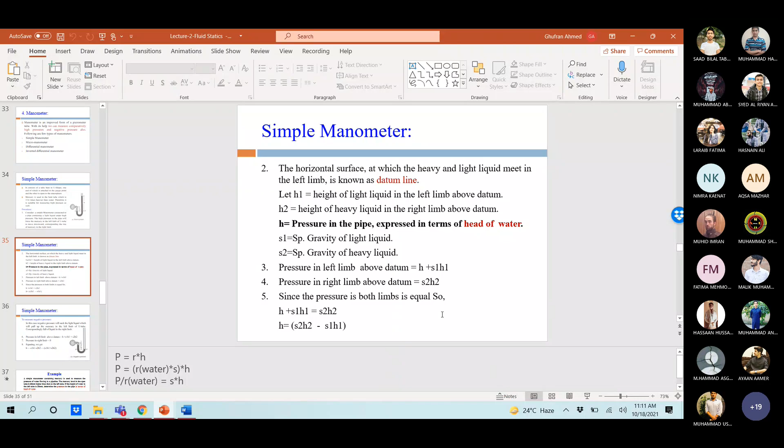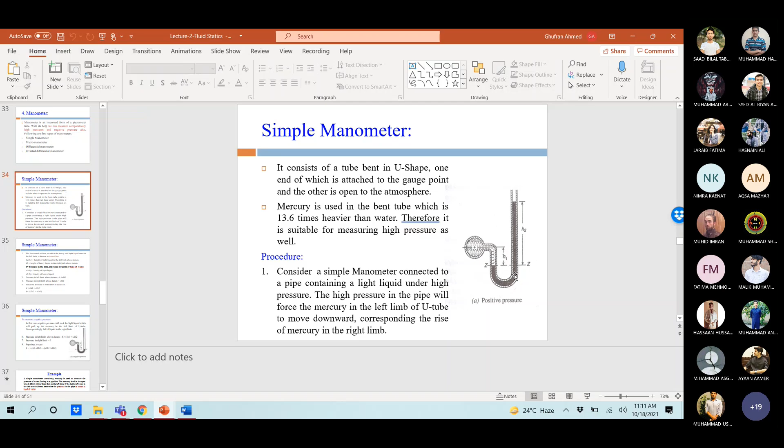Okay, so can we measure a negative pressure from this manometer as well? Nahi sir, uska effect cancel ho jata hai. How? I mean, kyunki sir ye jo base line hai Z, toh positive negative cancel ho jata hai isse. I'm asking about the negative pressure within the pipe, not the manometer.

If you have a negative pressure here, then this mercury, instead of moving down, it will move upward.

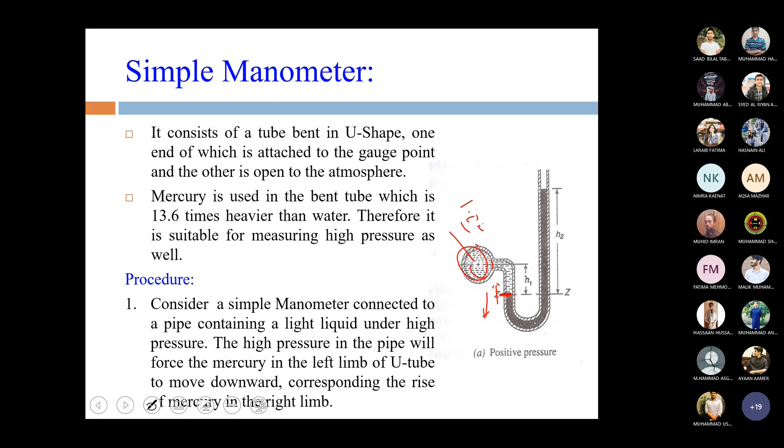Okay, so negative pressure, I mean, the flow moves from high pressure to low pressure. So if it has low pressure here, then the level of mercury in the left limb would be slightly higher, as you can see from this simple manometer. To measure the negative pressure, the mercury shifts to this level, and now the datum is decided from the right limb. So manometers can actually measure the negative pressure as well.

Okay, so do you have any confusion in forming these equations? Just like pressure in the left limb above datum is H plus S1 H1. Similarly, pressure in the right limb is S2 H2. So do you have any question regarding this?

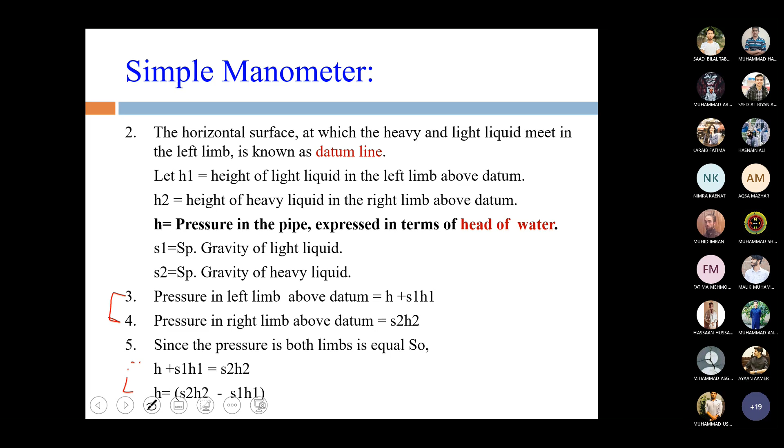Okay. So can you solve this example? Who can solve this example? Very simple example.

I think we have solved it. No sir, last week example ki nahi thi? Sir aapne sample laga tha, usko dekh lena.

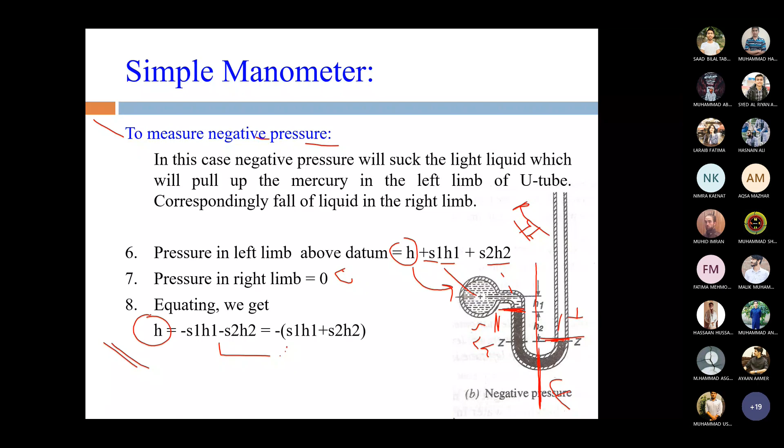Okay, so now the first example says that a simple manometer containing mercury is used to measure the pressure of water flowing in a pipeline. So say it has water in it, and the mercury level in the open tube is 60 millimeter higher than that of the left tube. Okay, so 60 millimeter is higher than that of the left tube.

So if left tube is here, 60 is the H2 basically. Okay, and if the height of water in the left tube is 50 millimeter, so this is height of water. Determine the pressure in the pipe. So equation kya hogi iski, kaun batayega?

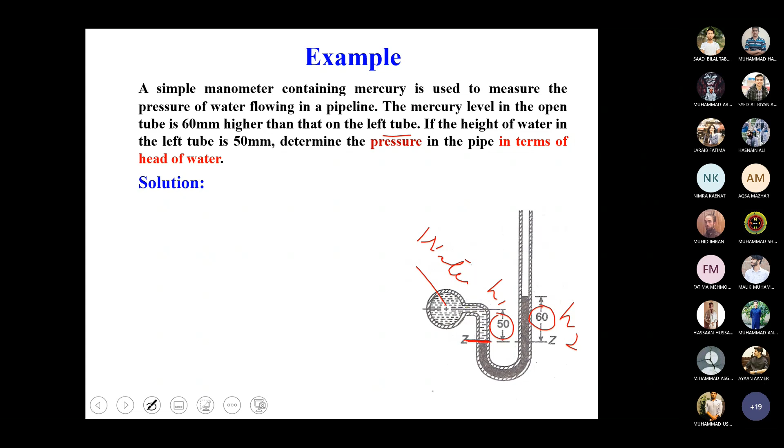सर पहले हम लेफ्ट लिम्ब में प्रेशर फाइंड कर लेंगे और राइट लिम्ब में प्रेशर फाइंड करके दोनों को बराबर करेंगे। इक्वेशन बताओ दोनों की। सर लेफ्ट लिम्ब की इक्वेशन होगी H प्रेशर विल बी इक्वल्स टू H प्लस S1 H1 और राइट लिम्ब की होगी प्रेशर विल बी इक्वल्स टू S2 H2।

Okay, is it clear? So actually, just want to confirm that these pressures are pressure expressed in terms of head of water. Okay, so just remember these are the pressure which are expressed in terms of head of water.

So now by just putting the value of S1 which is of water and H1, S2 which is 13.6, so here S1 is 1 and S2 is 13.6, okay, and all the respective heights are provided in the figure. So just put all the values here and find the value of H. Is it clear?

Yes sir. Okay, आगे चलें। Okay, so now another example.

Find negative pressure. A simple manometer containing mercury was used to find the negative pressure in a pipe containing water. The right limb of the manometer was open to atmosphere. Find the negative pressure below the atmospheric pressure.

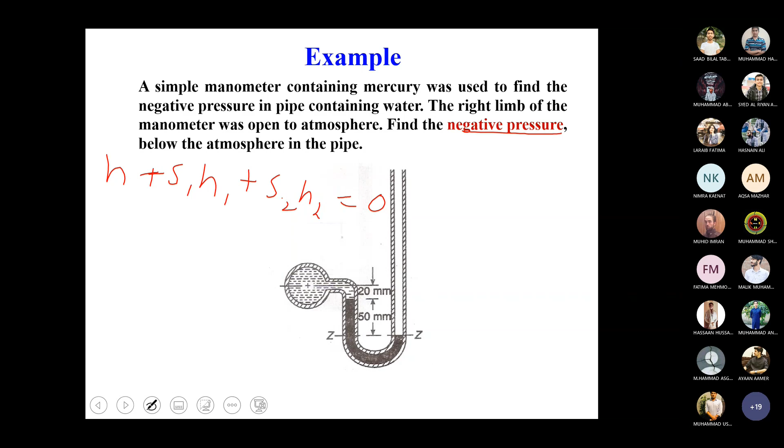Yes, no? Yes sir. What is the value of H1 in this figure? Sir, 20. Very good. And what is H2? 50. Very good. So you just put all the values here, and it is asked to find the negative pressure. Okay, if you compare both the examples here,

just look at the last line. What's written here? Determine the pressure in a pipe in terms of head of water. Means we need to find H, which is actually pressure expressed in terms of head of water.

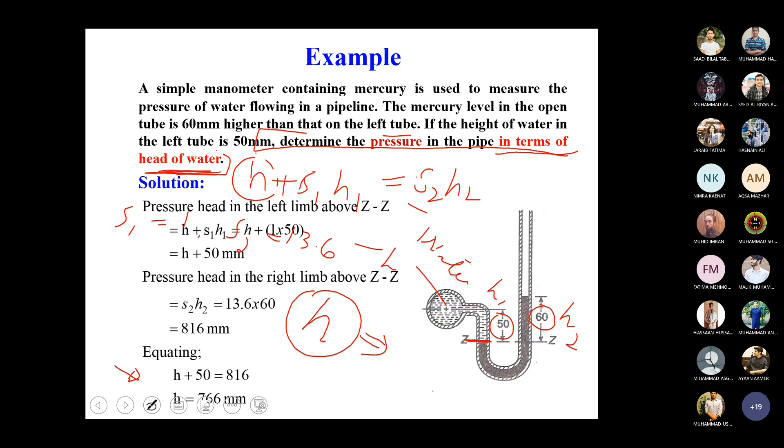Okay, but in this example, he asked to find the negative pressure, and pressure is basically P. It is not H here. Okay, so what is the relationship between P and H? Directly proportional. P is equal to gamma H.

Okay, so when we have the pressure, once we have found the pressure in terms of head of water H, we just simply multiply with the gamma of water in order to find this pressure. Okay, so be careful, during exam when you are asked about this manometer type problem, then just check out whether it is asked to find the pressure, or you are asked to find the pressure

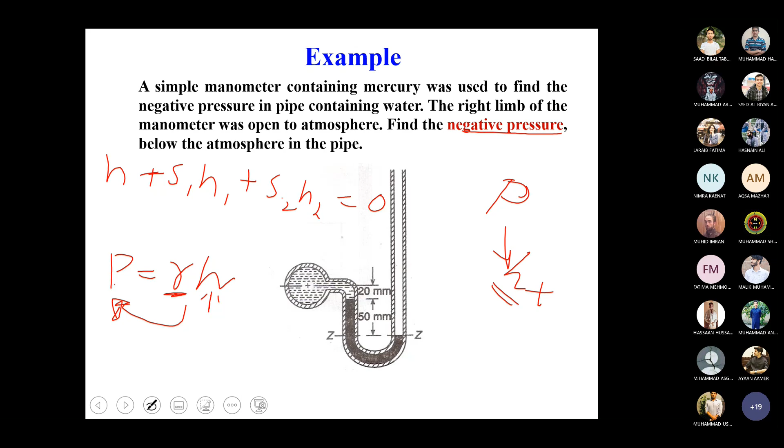in terms of water columns. Okay, so once we have found the head, you just multiply with the gamma, which is 9.81, to get the negative pressure or gauge pressure. Okay, any question? No sir.

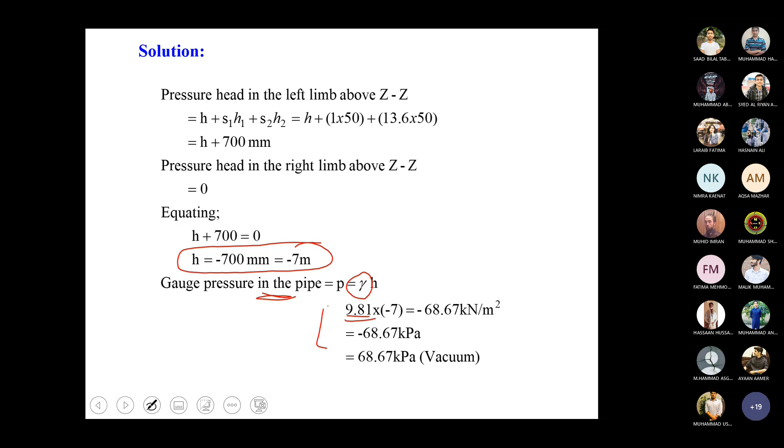Okay, another example. Figure shows a conical vessel having its outlet at A. This is point A, to which U-tube manometer is connected. The reading of the manometer given in the figure shows when the vessel is empty.

Okay, so this manometer reading is actually for the condition when there is no fluid in it. Okay, say there is no water in it, it is empty. So the datum actually shows the left limb reading of 200 millimeter. So here, say for the first case, H2 is 200.

यहाँ तक कोई confusion नहीं? And H, basically H is here as H1. Any confusion up till now? अभी हमने यहाँ तक समझ लिया।

Okay, next is find the reading of the manometer when the vessel is completely filled with water. Okay, after you just fill this vessel with water, what will happen? कौन बताएगा?

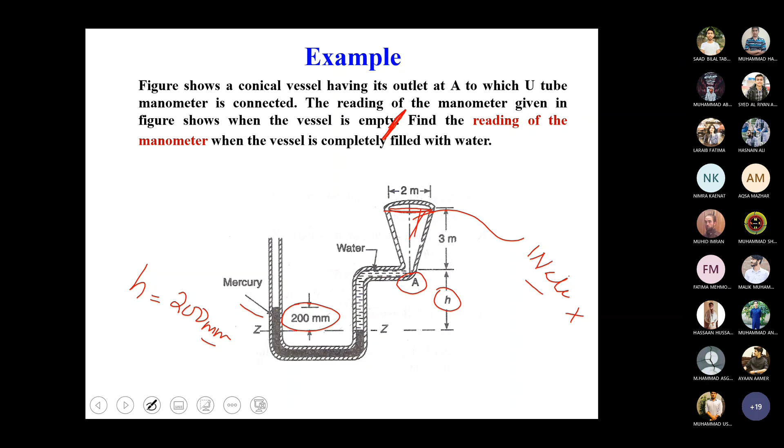ये अब यहाँ से पानी इसमें हमने इंसर्ट कर दिया। सर, लेफ्ट राइट लिम्ब से मर्करी का लेवल डाउन हो जाएगा और लेफ्ट लिम्ब पे इंक्रीज हो जाएगा। Very good. मर्क्यूरी का लेवल यहाँ से डाउन हो गया, डेटम इधर आ गया, और यहाँ से मर्क्यूरी का लेवल ऊपर चला गया। ठीक हो गया जी।

तो अब न्यू डेटम कौन सा बन जाएगा? ये वाला। एग्री कर रहे हैं?

So at the moment we do not know what is the level of mercury which will be suppressed, say X। Okay, और यहां से X ऊपर गया और इधर भी X की वैल्यू ऐड हो जाएगी।

Why have I written here X? सर डेटम भी तो रिड्यूस हो गया, इस वजह से यहाँ पे भी एक्स ही आएगा। वेरी गुड। सो डेटम जब रिड्यूस होगा तो means there would be a change of 2X in the left limb. Yes, no? यस सर। Okay, so can you tell me the equation for the right limb?

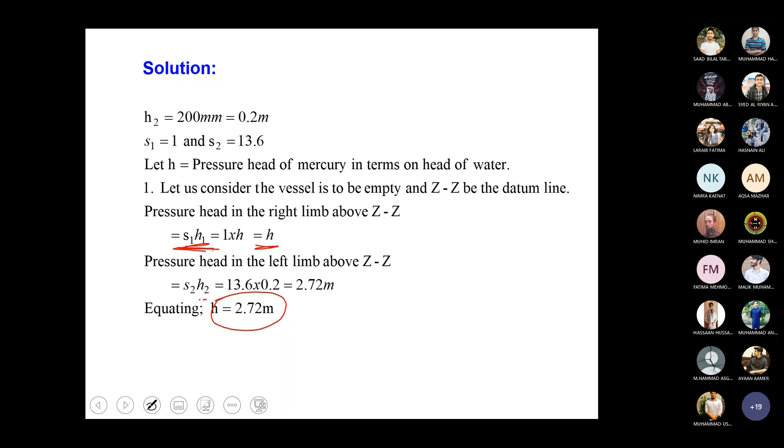So when there was no liquid in a vessel, S1H is equal to H. So H ki yahan se hum equation find kar sakte hain. Ji bilkul, theek hai ji. So once you have this H, so now you will make equation.

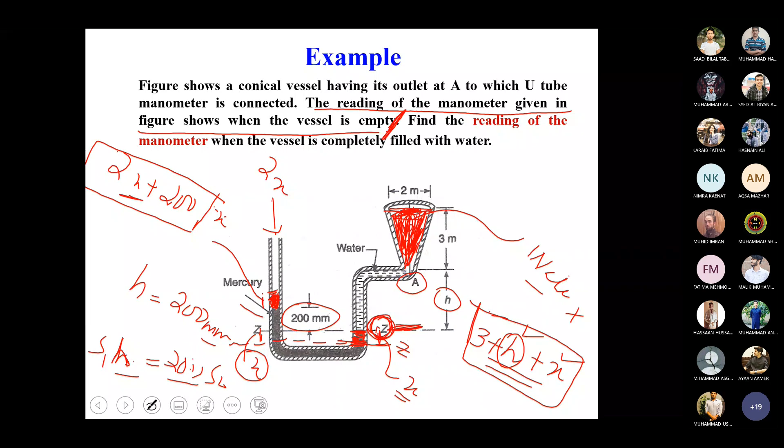Therefore, the total height of water in the right limb would be, it is again x plus h plus 3, jo maine yahan likha hai, x plus h plus 3. H agar 2 point something hai, 2.72, so then the equation for right limb becomes x plus 5.72.

Similarly, for the left case it is 0.2, which is 200 after converting it to meters, plus 2x. Okay, and you can equate, and finally you have the manometer reading, which is 0.2 plus 2x.

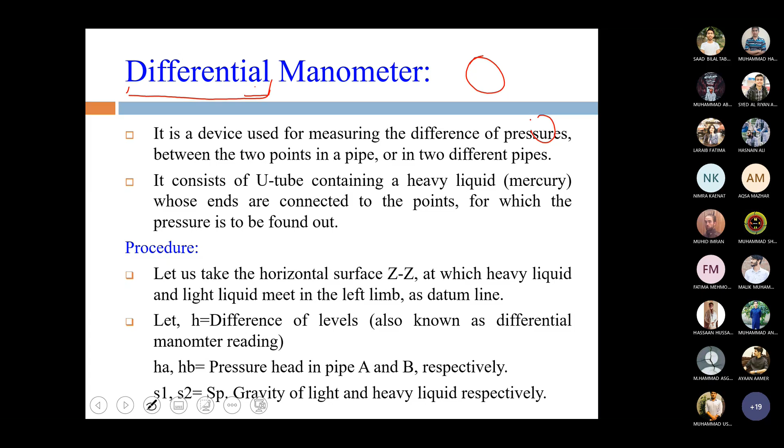So next manometer is of differential manometer. As from this word, you can see that this manometer is used to find the difference of pressure between, say, the two pipes. So if you connect this manometer between two pipes, then it will give us a difference of pressure between these two pipes. Okay.

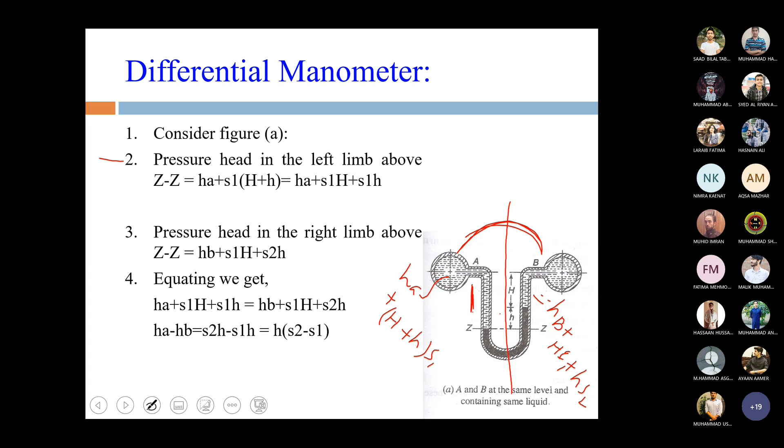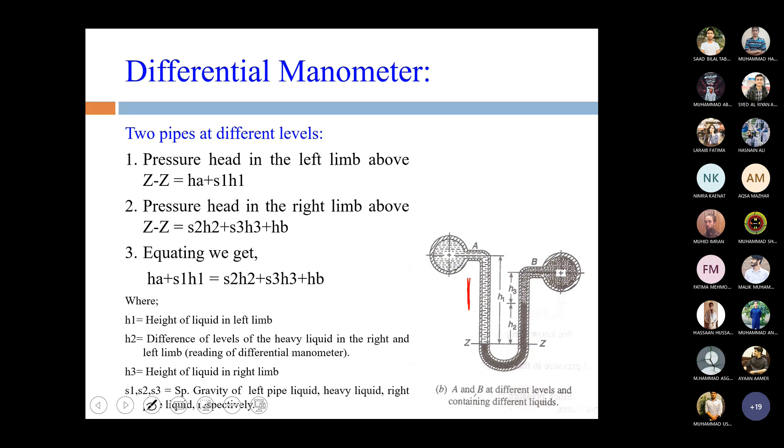Theek hai ji, any question? Very simple. Again, you just have to focus on the height and its respective specific gravity. Okay.

Okay, another example, a U-tube differential manometer connects two pressure pipes A and B. The pipe A contains carbon tetrachloride having a specific gravity of 1.6. So this is for pipe A. Okay, under a pressure of 120 kilopascal.

Okay, the important thing in this example is that this is the pressure. The value of pressure P is provided here, it's not the H. Similarly, the pressure in a pipe B is 200 kilopascal, which is PB. So this one is PA and PB.

The pipe A lies 2.5 meter above pipe B. So here's a distance between these two pipes, elevation difference. Find the difference of pressure measured by the mercury as a fluid filling U-tube.

So first of all, as the pressure is given, so we can convert this pressure in terms of height of water by just dividing with the specific weight of water. If we divide this PA by gamma of water, which is 9.81, we actually get the height of water column, which is 12.2 meters of water.

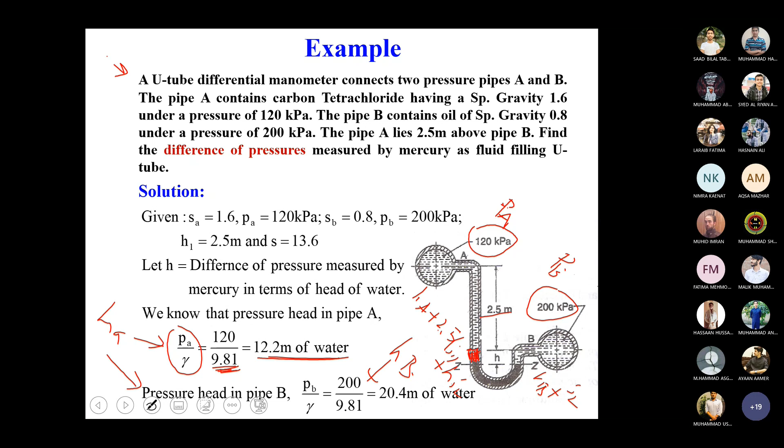So as the value of pressures are given, the only thing which is unknown is this H. So separately we can write the equations for left limb and for the right limb, and when we equate both the equation we can simply find H. Any question?

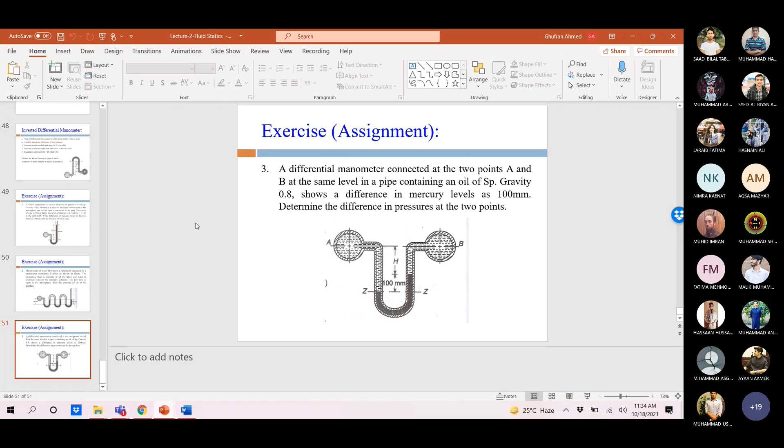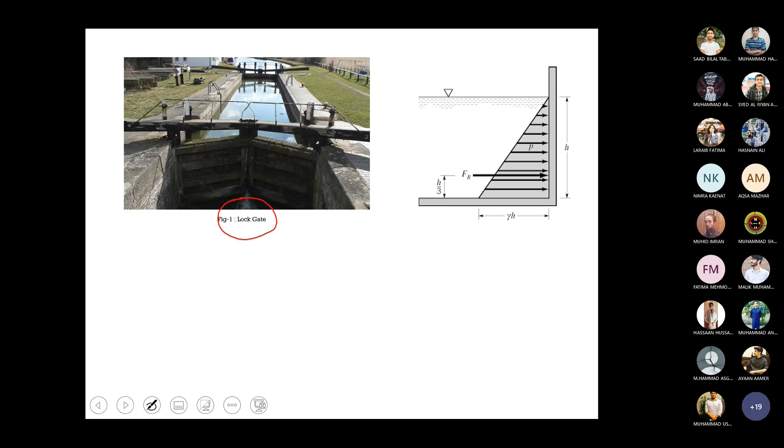It's written lock gate. Lock gate means just like if we have a very small stream of water or channel, then we provide a gate in order to restrict the water flow, in order to obstruct the water flow. So now in this scenario it becomes the static fluid. It comes to rest.

So this is the free body diagram. This is a gate and the total height of water is H here. The pressure distribution diagram is shown in this figure, which is triangular. Meaning if we move deep, then the pressure increases. P is equal to gamma H. Greater the height from the top, greater would be the pressure.

So what are the important things which we should find out regarding this pressure distribution? Can anyone tell what is most important in this figure, in the right figure? Resultant force. Very good. Resultant force is very important. What would be the resultant force acting on this gate?

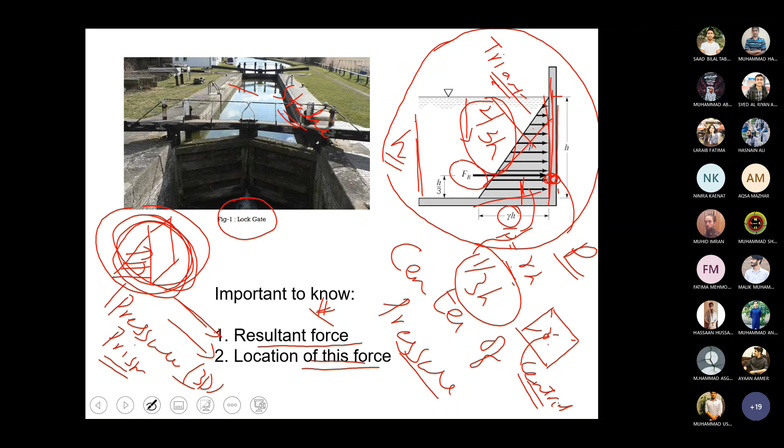If we find the centroid of this triangle, what will it be? From the top it will be 2/3 of h, and from the bottom it will be 1/3 of h. So if we justify this pressure distribution diagram, then we can say that the resultant force will act at the centroid of the pressure distribution, not the centroid of the body, but the centroid of this pressure distribution.

So no tangential force can exist within a fluid at rest. All the forces are normal to the surface. We have already discussed this point in our previous lecture as well. If the fluid is not moving, then there would be no tangential force acting on it. However, there would be only normal forces which are acting perpendicular to the body surface. If pressure is uniformly distributed over an area, the force is equal to the pressure times the area, and the point of application of this force is the centroid of the area. This is how pressure works: the force equals pressure times the area.

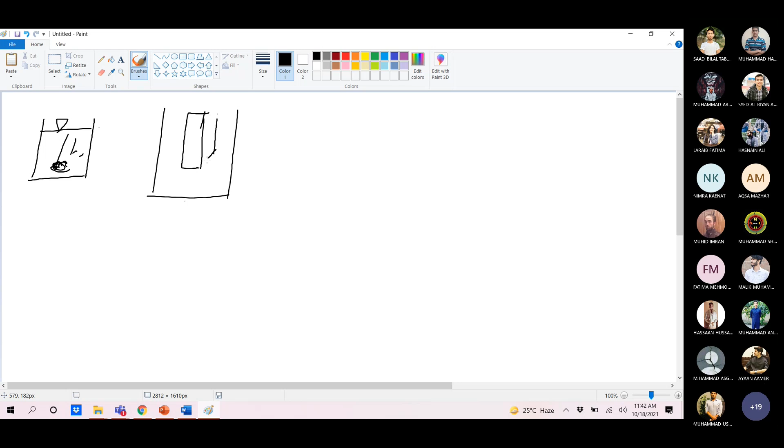Say we have a water tank. Consider this particular point, the height is h. If we consider this thing in a 3-dimensional column, this is the area, and the height of this water column is h.

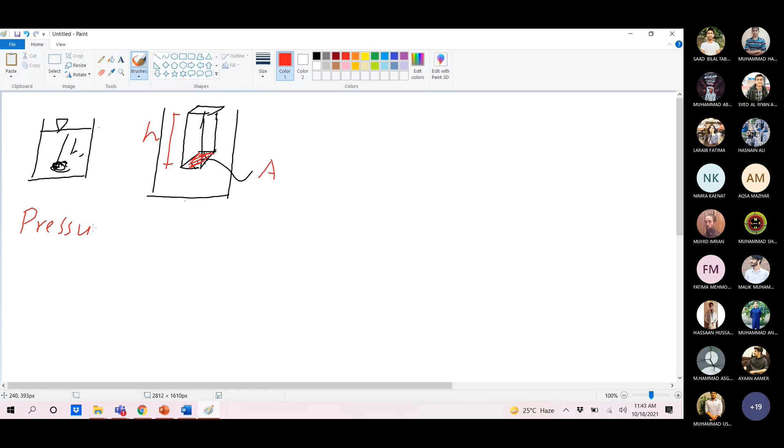So what would be the pressure at this point P? It is basically equal to force per unit area.

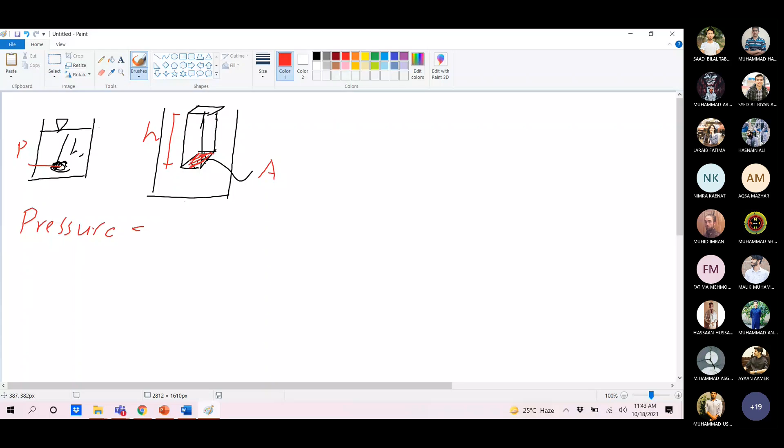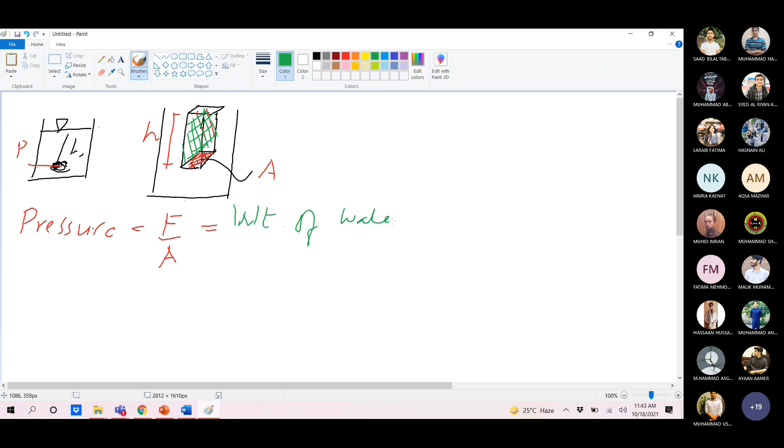And what is the force basically here? The force is actually the weight of the water column exactly over this area A. So force will become: weight of water column above this area A.

And what is the weight here? Mg divided by area A. And we know that density is equal to mass per unit volume, so M is equal to density into volume. So we can write here density into volume times G divided by area A.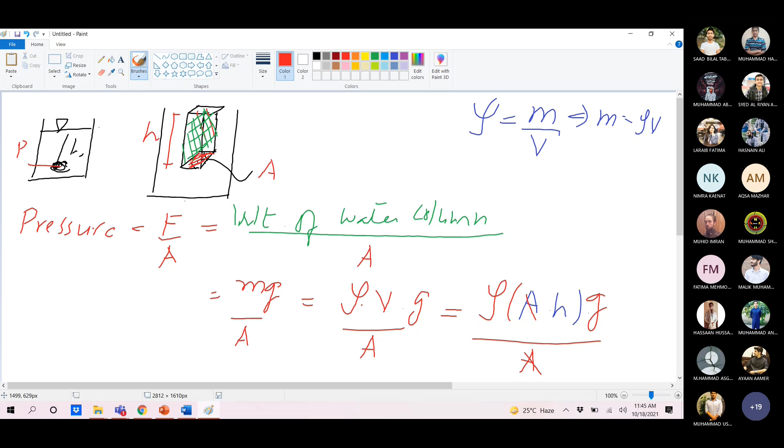And what is the volume here? Volume I can write as A into H. Divided by area. So this area will cancel with this area, and our answer would be rho G H.

So pressure actually depends on three things. One, density - obviously if you fill this column with mercury instead of water, then the pressure would be different against the same height. Second is depth. And third, gravitational constant - for Earth, if it's not changing, then it is same. However, the pressure changes with the gravitational constant as well.

So to find force on a submerged wall, the pressure increases as we move down. Any question in this description? No sir.

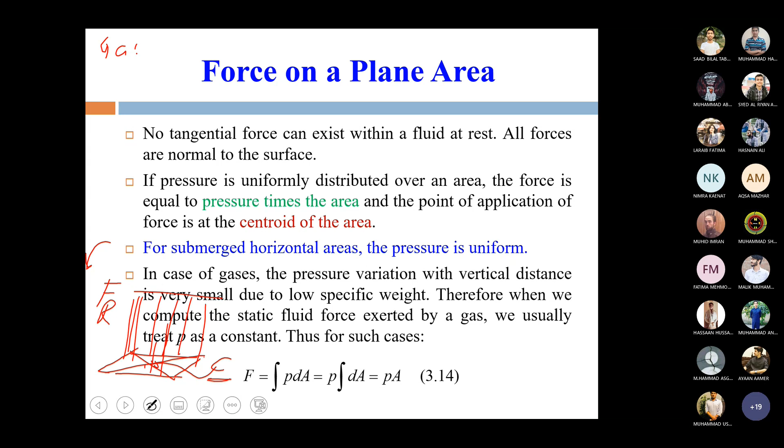Say if we have a wall, then the pressure distribution diagram is exactly rectangular. So here the force F is equal to P times area, and we usually consider P as constant.

In case of gas, we cannot say that this P is constant in a fluid generally, but if we divide this pressure distribution into unit strips, having an area say A1, then in order to find the total force we can just take the integration: F equals integral of P dA. Here P is constant for gases, so it moves outside the integration, and the total force would be F equals P times A, in terms of gases.

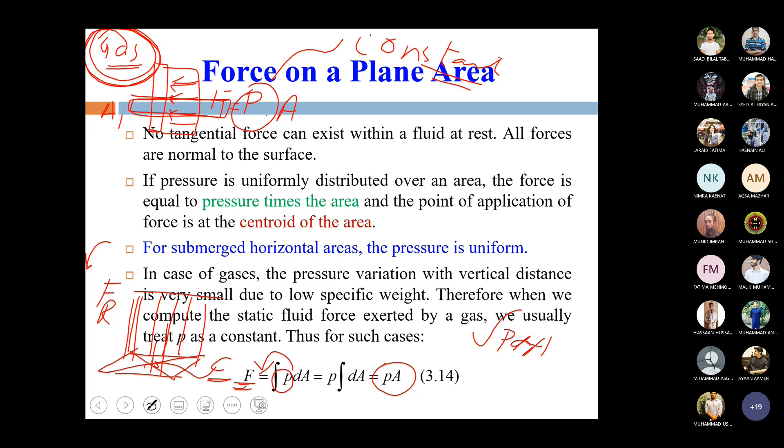However, in case of liquids, the distribution of pressure is generally not uniform - you can see this distribution. In the gas case we saw that if this is a plane, its pressure distribution diagram is exactly rectangular. However, in case of liquids, the distribution of pressure is generally not uniform, so further analysis needs to be done.

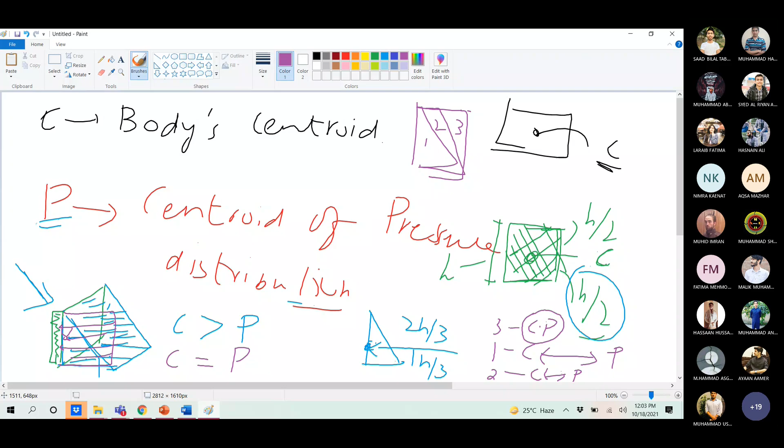तो एग्री करेंगे मेरे से? यस सर। यही चीज अभी मैंने स्लाइड्स में एक्सप्लेन की है। से पहले अगर प्लेन आपका MN इज सिचुएटेड एट द टॉप ऑफ वाटर सरफेस, तो C इज हायर देन P, ठीक है। जस्ट लुक एट माय माउस कर्सर, and if I move this plane to a deeper depth, then you see that P is approaching point C.

डिस्टेंस बहुत कम हो गया, क्योंकि डिस्ट्रीब्यूशन चेक करें आप इसकी। अब यही चीज अगर मैं रेक्टेंगल बना दूं तो C and P will coincide. So in the case of liquid, the distribution of pressure is generally not uniform.

So further, let us consider a vertical plane whose upper edge lies in the free surface of a liquid. Let this plane be perpendicular to the plane of the figure, so that MN is edge. MN is basically an edge of any rectangular body. The gauge pressure will vary from 0 at M to a value at N.

The total force on one side of the plane is the summation of the products of elementary areas and the pressure upon them. जो मैंने यहाँ पे अभी आपको कहा था कि आप यूनिट स्ट्रिप्स में डिवाइड करें और फिर उसका इंटीग्रेशन ले लें, ये वही चीज यहाँ पे एक्सप्लेन्ड है। Say this is A1 and P1 plus A2 and P2, etc. So you get the total force.

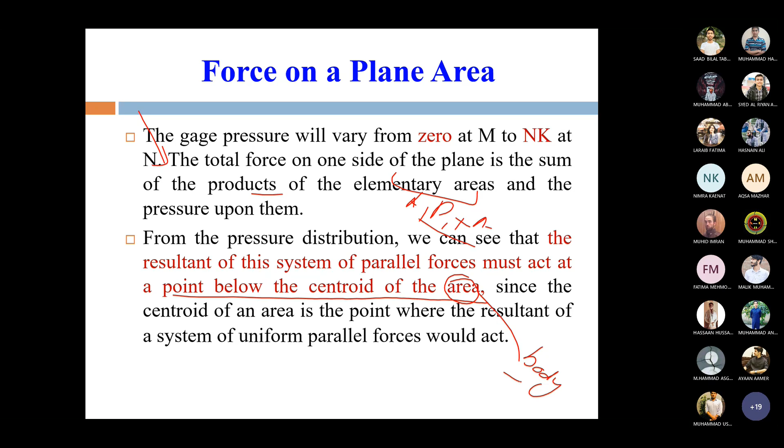So from the pressure distribution, we can see that the resultant of this system of parallel forces must act at a point below the centroid of the area or body. ठीक है जी? Since the centroid of the area is the point where the resultant of a system of uniform parallel forces would act.

Now if we lower this plane to position M dash, N dash, the change of pressure from M dash to N dash is less than it was from M to N. Here the change of pressure is low, here the change of pressure is high, means 0 to maximum. Here it's not 0, it has some value, so the difference is less here.

Hence the resultant pressure force will act near to the centroid of the plane surface. Okay, so this is C. डीप अप कन्क्लूजन क्या हो गया भाई? This is, you can say, the deeper we submerge the plane, the smaller the pressure variation becomes, and closer the resultant moves to the centroid, means P would approach C.

Any question? किसी को ना समझ आया हो? क्लियर है? Yes, yes sir. रिस्पॉन्स बड़ा लेट देते हो।

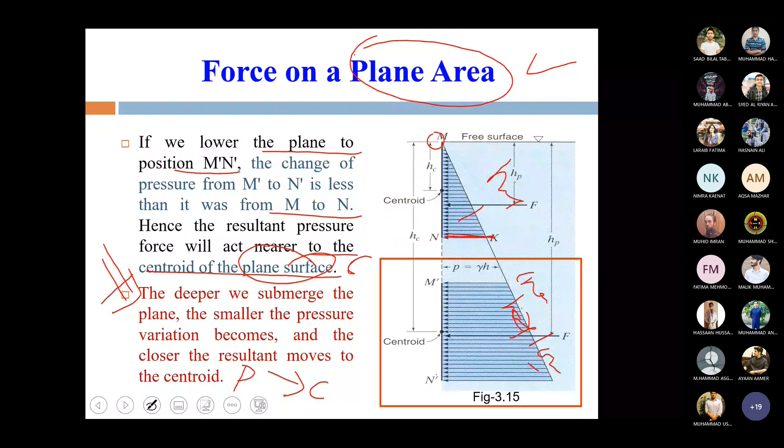ओके, पहला केस हो गया फोर्स ऑन अ प्लेन एरिया। एक सेम प्लेन में चीज लाई कर रही है, बट देयर आर चांसेस कि आप इंटरैक्ट कर सकते हैं विद सम प्लेन एरिया व्हिच इज इन अ स्लोपिंग पोजीशन, जस्ट लाइक अगर कोई टैंक है, से वाटर टैंक, कुछ इस तरह भी तो हो सकता है।

ठीक है जी, कि फोर्सेस इधर पहले तो इधर लग रही हैं, अभी हमने ये केस डिस्कस कर लिया। अब कोई केस ऐसा हो सकता है जिसमें फोर्सेस परपेंडिकुलर ऐड करें एट सम एंगल। सो अब हमने ये केस डिस्कस करना है। कंसेप्ट वही है, प्रेशर प्रिज्म क्या है, प्रेशर डिस्ट्रीब्यूशन C क्या है, P क्या है। अब ये चीज मुझे यकीन है कि आपको पता होनी चाहिए, अगर नहीं पता तो पहले पूछ लें C क्या और P क्या है, क्योंकि दोबारा से फिर मुझे उसमें बताना मुश्किल हो जाएगा।

Any confusion between C and P? No, sir. No, sir. No, sir. Who will explain what is the difference between C and P? Any volunteer?

Who will explain the difference between C and P? Sir, C is the centroid of the body or any geometric shape. And P is the centroid of the pressure distribution diagram. Okay, so P is pressure distribution. Remember these two points, it's very important.

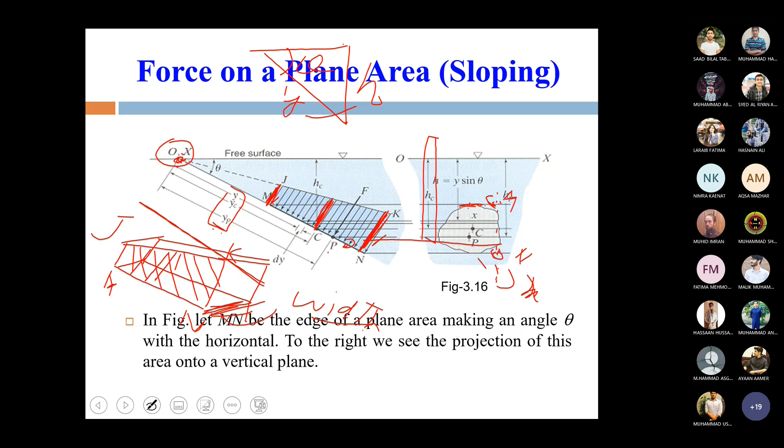So if x varies, what we can do is divide this into small strips, just like I explained in this figure. If x varies, we must integrate to find F. We just divide into a number of small strips, and against each strip pressure would be the same.

Let h be the variable depth to any point and let y be the corresponding distance from OX. I already explained h and y to you. This is the intersection of the plane containing the area and the free surface. So this is the explanation of this OX basically.

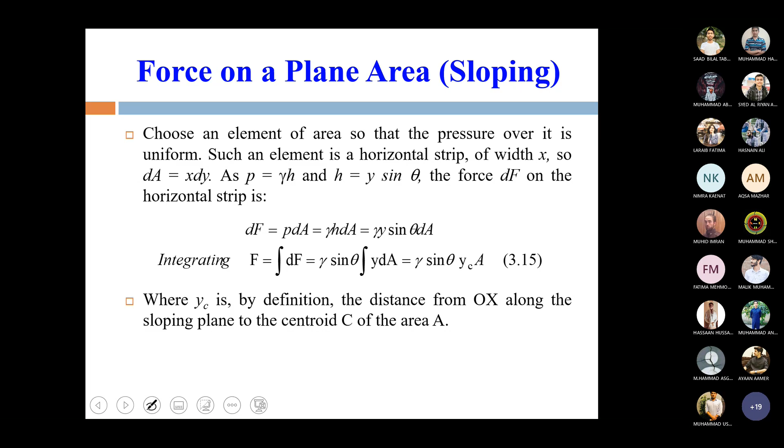Okay, so I said that if we take a unit strip having area, kaun hai? Bachche apna mic off karo.

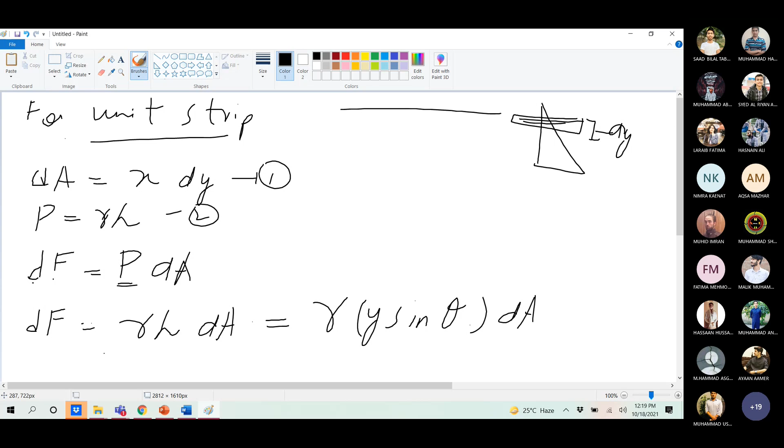Okay, so we can write H in terms of y. So if we take the integration of this,

so it becomes F is equal to gamma sine theta y dA. Do you know what is this y dA integration?

It is basically the static moment of area, or first moment of area. So we can simply write F is equal to gamma

sine theta y CA, which is the centroidal distance, or F is equal to gamma HCA. So this is the formula

3.16 with reference to lecture slides. This is the formula which is used to find out the resultant force, gamma HCA. So we can simply find the resultant force and it depends upon the body centroid.

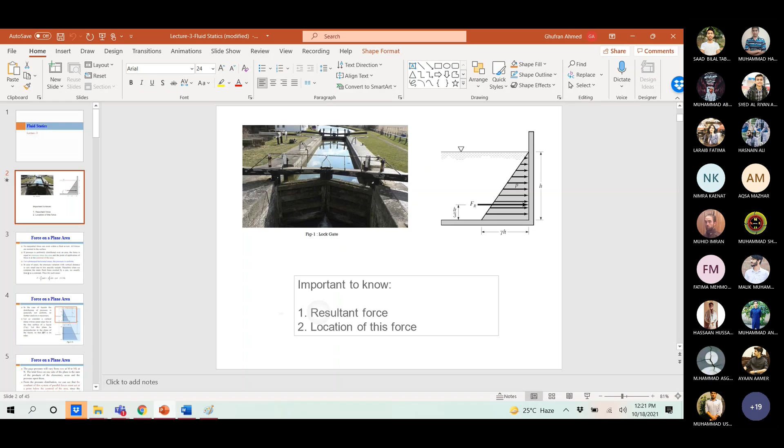Okay, so where it is applied, so next step is humne woh find karna hai ki yeh ab force kis jagah pe act karegi. So first part, jaise ki humne lecture mein discuss kiya tha initially, is important to know the resultant force. Okay, next is the location of this force.

Yahan tak humne ji abhi kar liya hai. So thus we find the total force on any plane area submerged in a liquid by multiplying the specific weight of the liquid by the product of area and the depth of its centroid, here it is of body.

The value of F is independent of angle of inclination of the plane so long as the depth of its centroid is unchanged. Okay, and you can see clearly here that if the body is placed like this or this or this, until and unless HC is not changing, the force will remain the same.

Since gamma HC is the pressure at the centroid, we can also say that the total force on any plane area submerged in a liquid is a product of area and pressure at its centroid. So this is, I'm again telling, just for finding the magnitude of force. The pressure at its centroid is of body.

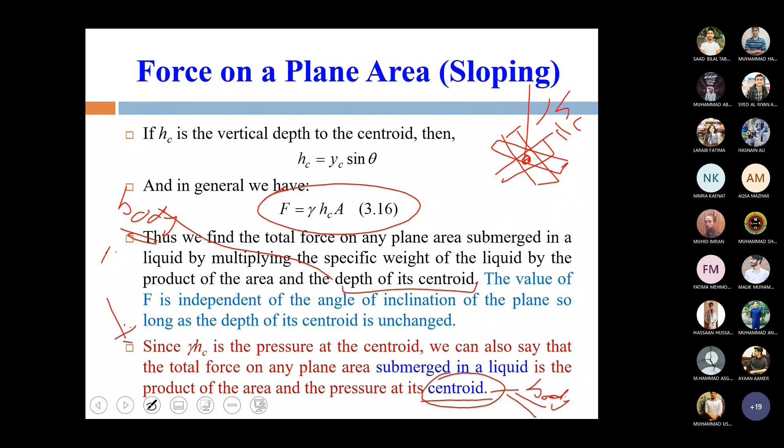Next is the center of pressure. The point of application of the resultant pressure force on a submerged area is called the center of pressure. Yeh jo humne abhi baat ki thi ki pressure distribution diagram, ab yeh kya, yeh pressure distribution diagram ka centroid hai. Agar triangular hai toh 2/3 from top and 1/3 from the bottom.

So the point of application of resultant pressure force on a submerged area is called the center of pressure. We need to know its location whenever we wish to work with the moment of this force. So the most general way of looking at the problem of forces on a submerged plane area is through the use of the recently discussed pressure prism concept.

Wahi cheez hum dobara dekhenge. The line of action of resultant pressure force must pass through the centroid of pressure prism. Theek hai ji, yeh yahan pe likha hai, it's a volume basically. Yeh wahi cheez discuss ho rahi hai. The line of action of resultant pressure force must pass through the centroid of pressure prism.

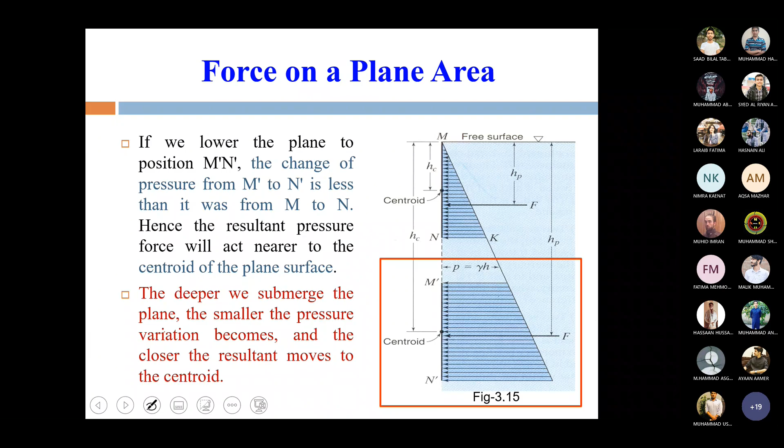As noted earlier, this concept is very convenient to apply for simple areas such as rectangles. For example, if the submerged area in figure 3.15, agar hum isko dekhein toh it's very simple ki aap, however, in case of constant width, we know that the centroid of the pressure prism is 2/3 of mn from below m.

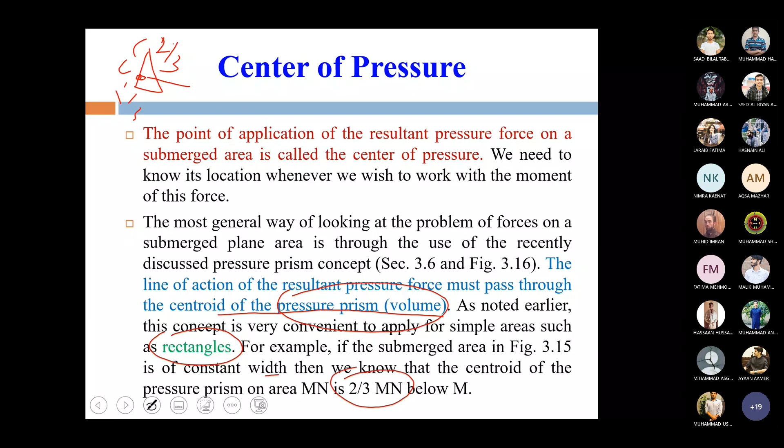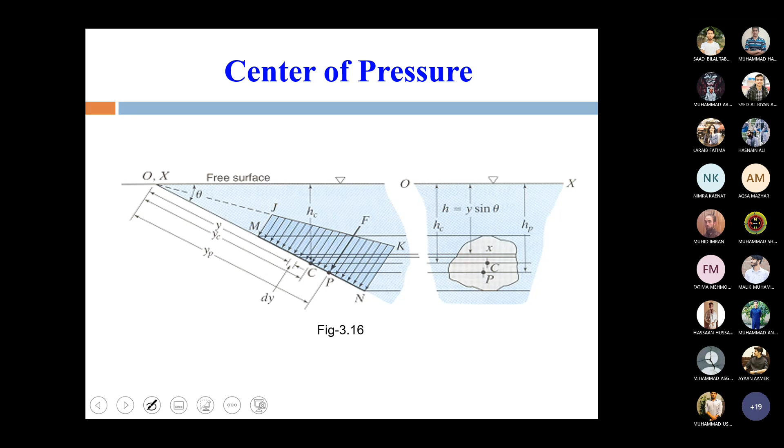Okay, however, if we have an arbitrary shape figure, then we must know, or we must find out the formula which we can use in order to find out the location of this center of pressure.

So we would, I will continue the same derivation. Iske baad se main continue karunga. Theek hai ji.

Previously we saw that dF is equal to gamma y sin theta dA. Now if I multiply both sides by y, we get y dF is equal to gamma y square sin theta dA.

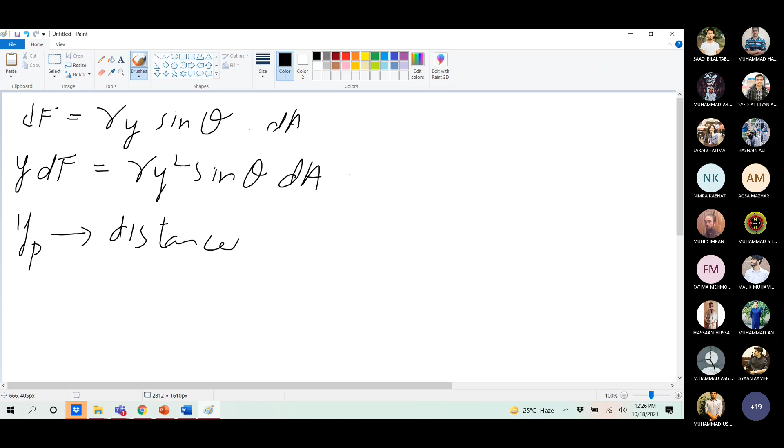Or I can say that yp actually denotes the distance to the center of pressure, so I can replace simple y with yp. So yp F is equal to gamma sin theta y square dA.

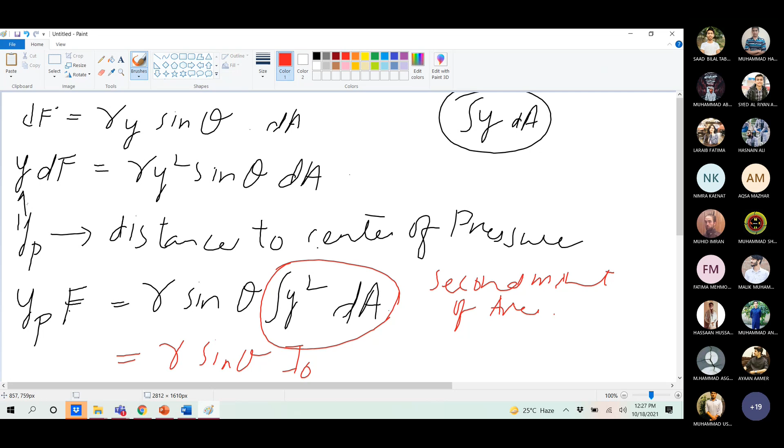Just as in the previous figure we said that y dA is the first moment of area, similarly y square dA is basically the second moment of area, or we can also write it as moment of inertia. So gamma sine theta I naught — y square dA is basically I naught, the second moment of area or moment of inertia. So our formula actually becomes...

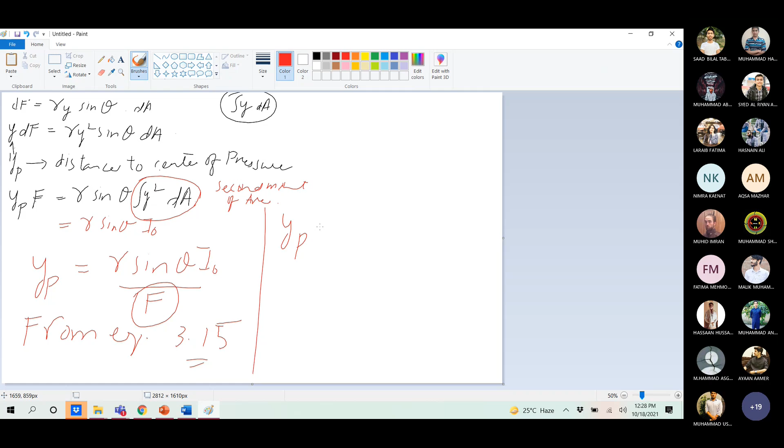yp is equal to gamma sine theta I naught divided by F. So from equation 3.15 we can write the formula of F. So it becomes yp is equal to gamma sine theta I naught over gamma sine theta Y C A.

Gamma sine theta will be cancelled, so yp is equal to I naught over Y C A. Okay, just wait a minute. So, formula for yp is I naught over Y C A.

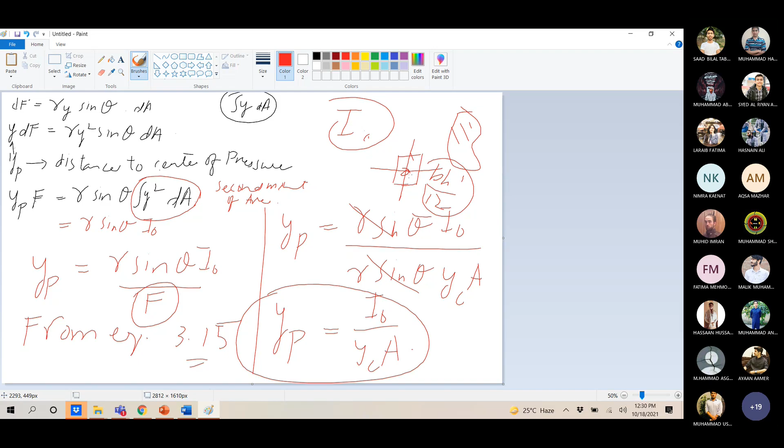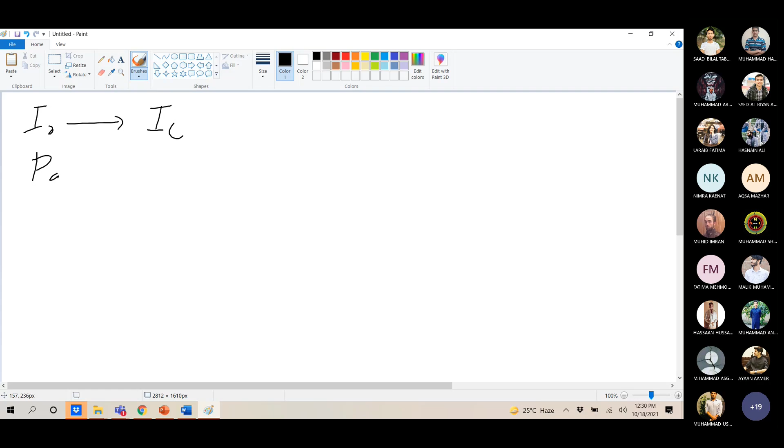So now what do we do? We will transform this I naught to IC by using the parallel axis theorem, which states that...

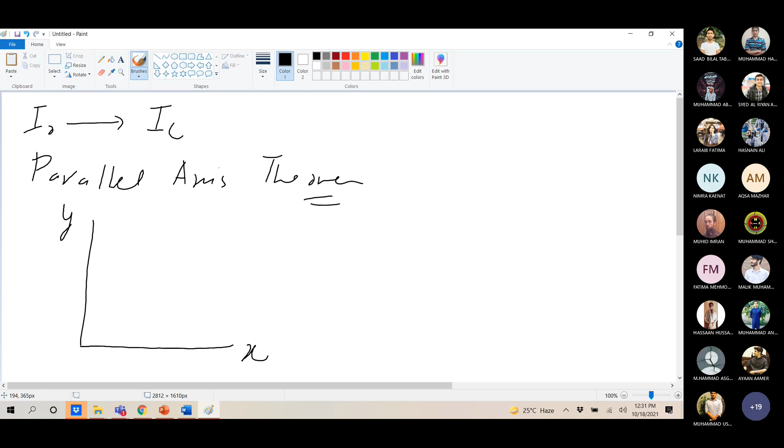Moment of inertia — let me draw this. Here we have the I naught axis, IX, and if we have any body having its centroid point C here, and we draw another axis for the centroidal point, and consider this point, the distance from here is y dash and here is x dash, and the distance of this centroidal point is dx till here and dy from here, and this is d.

So we can write Ix as Ix dash plus A dy square, and Iy as Iy dash plus A dx square.

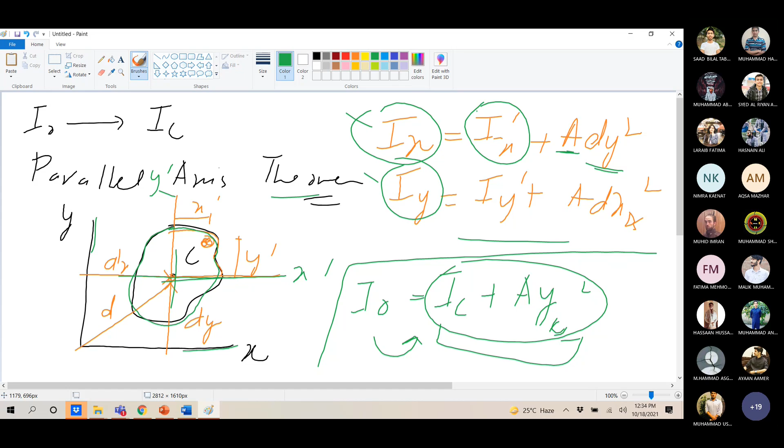Now it's easy to find the moment of inertia about the centroid for different bodies. That's why we converted I naught into IC. Now we just replace I naught with this formula in our previous formula of yp, and if we solve it — we put IC plus A YC square in place of I naught.

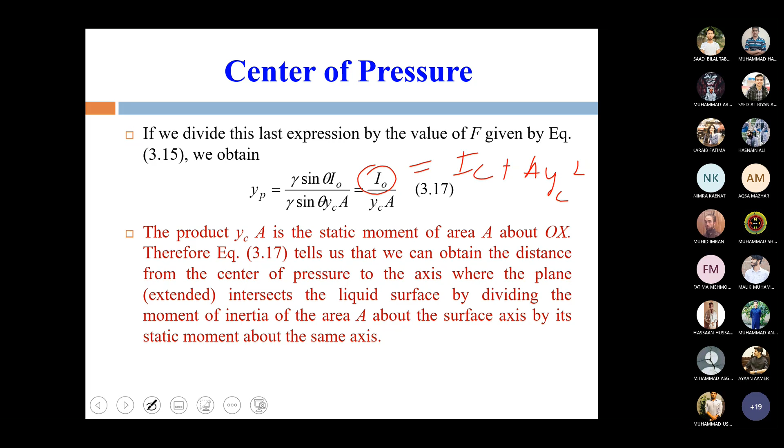Using the parallel axis theorem, after simplification we get this formula: yp is equal to yc plus IC over yc A. And yp is the point at which the resultant force is acting. So we have related yp in terms of yc, IC and yc A.